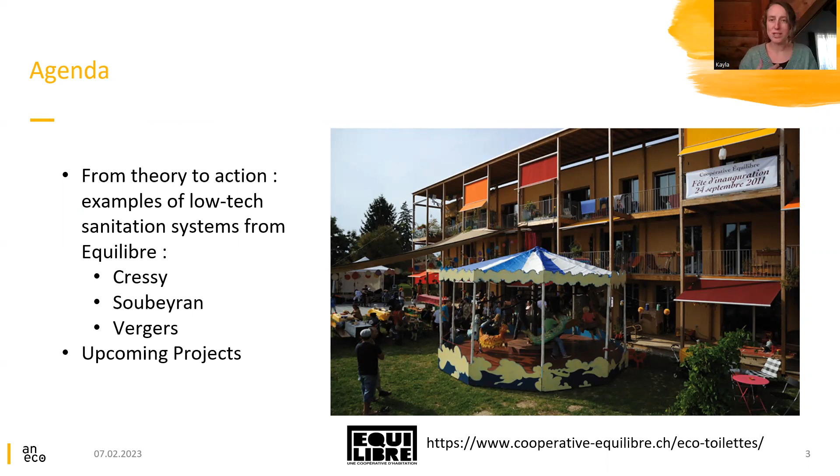Today, though, I will be mostly presenting the projects done by Equilibre, as there are three buildings made by Equilibre. It's an eco-responsible housing cooperative here in Geneva. And these are the first three apartment buildings that have implemented decentralized natural wastewater treatment systems in their plan. Note that these buildings were all built before Aneco existed, and since Aneco was founded in December of 2020, Aneco is now responsible and has taken over managing these systems, doing any type of changes or modifications to them that we will get into as I show.

So today I will go through Cressy, the first Equilibre building, built in 2011. At Cressy, there are two different types of treatment. There are the dry composting toilets, and then for all the gray water, there is a planted filter. As we're talking more about toilets today, I will focus on the toilet part, not the planted filter. There's a system at Soubeyran, which is a vermifiltration of both the black water and the gray water.

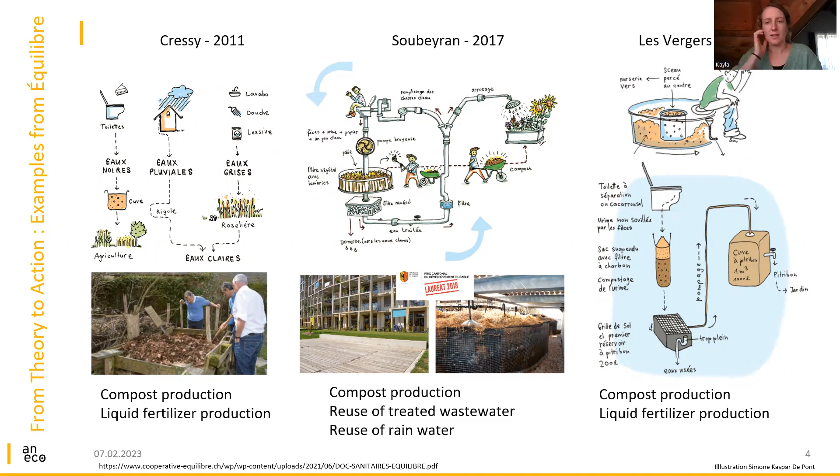And then there is Les Vergers, which was built in 2018 and has experimented with pilot projects of two different systems, one being the Cacaroussel, a dry toilet that is just within the apartment home, and then the Pitribon, which is the treatment of the urine that is separated.

So to begin, Cressy, as I just said, is a composting toilet. Here in the upper right-hand corner, we see the composters. These are three different composters, located in the basement of the building. These composters are connected to the Berger Biotechnik toilet, which is a German toilet. And since 2021, these toilets were also equipped with the Separette, a type of toilet seat which allows the urine to be separated. This was done because of odors coming off the ventilation on the rooftop and bothering the neighbors. And so it was decided to separate the urine.

Here to the bottom right, we see a schema of the composter. We see the ventilation, which is a passive ventilation going from the toilet to the rooftop. We also see the three different compartments of the waste. The first compartment is really the fresh fecal matter. In the beginning, it was fecal matter and urine and toilet paper and everything else that goes into a toilet. The second part is the volume once it's a bit degraded, but it really stays in the first and second part during the first year of composting.

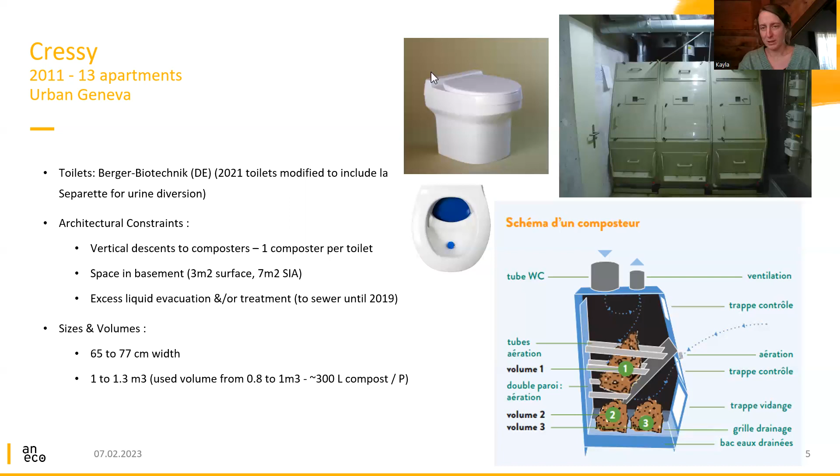Also the sizes and volumes. So the composter has a width of between 65 to 77 centimeters. And this width really depends on the household size and the apartment size. So it can treat from 1 to 6 people. And the volume is 1 to 1.3 cubic meters, with about 300 liters of compost per person being the volume necessary.

So a bit also about the maintenance of such a system. Each inhabitant of Cressy is responsible for their composter, and 2 times per month they go down into the basement to check on how the composter is going. They have to see if the compost has a nice humidity. If it's not humid enough, they must add water. If it's too humid, they add straw.

If there are flies, they can add leaves from the garden, which was a big breakthrough, because maybe 1 year after the start, they had many problems with flies. They tried many different solutions, and the one that worked best was introducing leaves from the yard, as the leaves contain spiders and many other insects, which are natural predators of the fruit flies. So if any flies are present, they can just add more leaves.

If they see the earthworm population is not so high, they can add more worms, and they have to clean the air filter if it's blocked. And then once per year, they have to empty the compost. Here on the right, there's a schema of this mass balance.

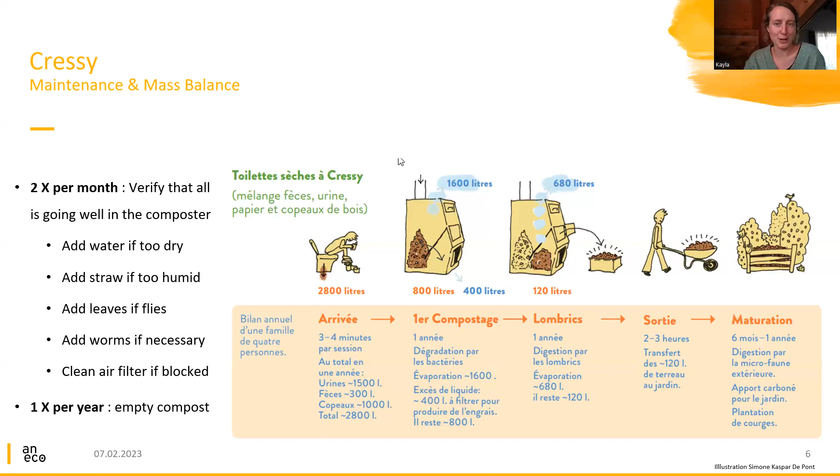So that's the composting toilet at Cressy, and now we can move on to the vermifiltration system at Soubeyran. Soubeyran is the second building built by Equilibre, and this building was much bigger: 38 apartments, 100 people, and 7 stories. With this size, it wasn't possible to redo the composting toilets. They had to think of a different technology, a different way of treating the water.

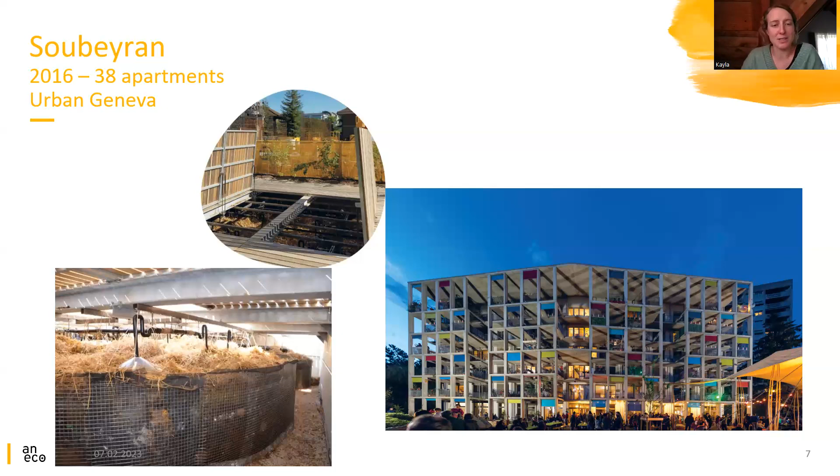The Equilibre bureau searched for many different solutions, and they finally found Philippe Moyer-Genoux, a biologist from Switzerland, who talked to them about this vermifiltration system, and this is what they ended up installing. So here's a schema. It's quite hard to understand, but we can walk through it. The toilet that's used is a Wostmann EcoFlush.

And why are the two separated? The black water and the urine are not actually treated separately. It's remixed, but the reason for separating the two at the toilet was really to have a very low flush volume.

So with this toilet, there's a 0.5 liter small flush and a 2.5 liter big flush. And this was really important to not have too much water arriving onto the filter system, because the earthworms, we do not want to drown them in too much water. So the system starts there with the toilets.

The black water then, after remixing, is found in an intermediate tank where there's a pumping station, and it's a shredding pump that will shred this content onto the vermifilter. The vermifilter for the black water is 44 square meters, so it's very large, and it's located in a treatment pit that's in the yard at Soubeyran.

I will go just quickly into the gray water so you know what happens to the gray water, though we're focusing mostly on toilets today. So the gray water is also treated by a similar system, a vermifilter system, though it is degreased first. It arrives via gravity into the treatment pits. And then from the degreaser, there's a part that's pumped from the bottom. Everything that sediments out of the degreaser is pumped onto a vermifilter, which is much smaller than the black water one.

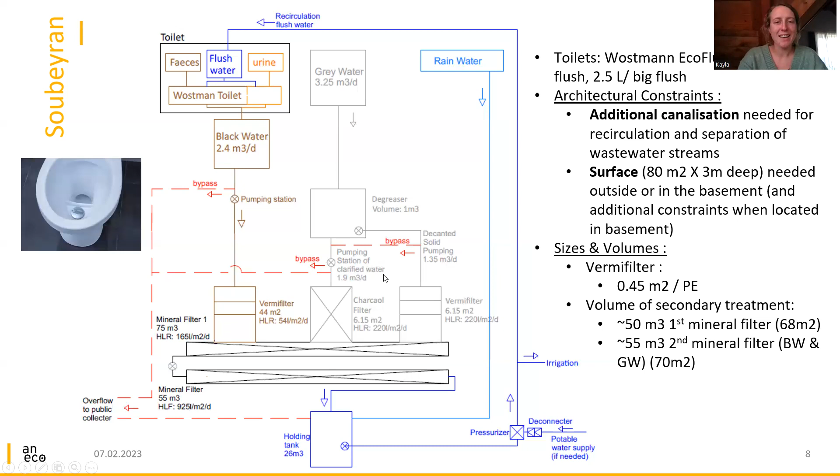Sorry. Yeah, so the sediments from the degreaser are pumped onto a smaller vermifilter, 6.15 square meters, much smaller than the 44 square meters for the black water. And then the clarified gray water is just treated on charcoal here. All of the water is then mixed and treated by two separate mineral filters.

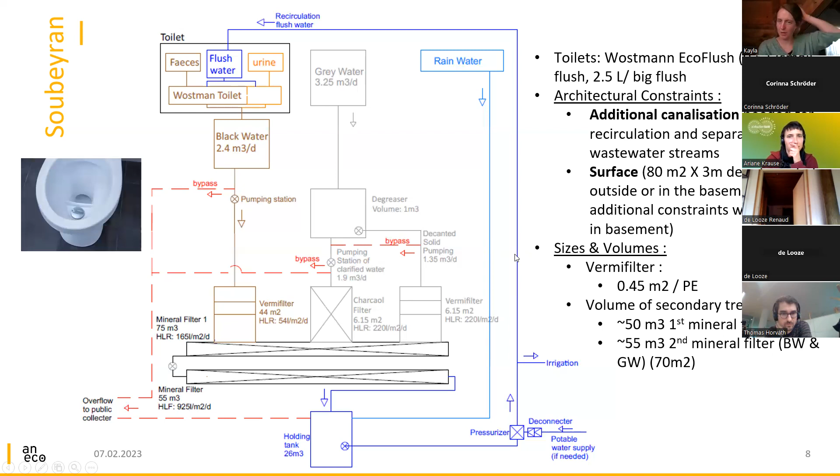So what are the architectural constraints of such a system? All right, here I have another schema that shows it a bit more nicely. The architectural constraints are that there's additional canalization needed. So there's two different canalizations coming out: the black water from the toilets and the gray water from the rest. And there's also two canalizations going in, because this water is then reused for flushing and for watering. The treated water is used for flushing the toilets and watering the garden. So you have the drinking water and the treated water going into the building.

It also needs a large amount of surface. So in this case, the treatment pit is 80 square meters by 3 meters deep. And this can be either outside or in the basement, depending on what is available for the different sites. Here at Soubeyran, they put it in the outside area as there was space.

Just to give an idea about the sizes, here the dimensions were 0.45 square meters per person equivalent. That was for just the vermifilter part. And then for the secondary treatment, the mineral filters, the first one is 50 cubic meters and the second one is 55 cubic meters. So we're talking quite large volumes here. So it takes quite a bit of space.

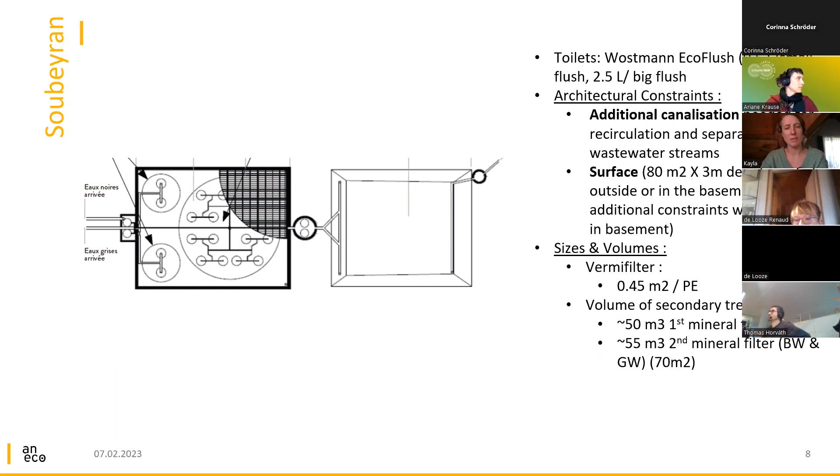Some implications for the inhabitants. They have to use ecological and biodegradable cleaning products and hygiene products, as it's a really natural system. The urinating needs to be done while seated in order for the separation to work accordingly. And also they need to clean the toilet in a certain way, because there can be struvite accumulation due to the very little flush water. So always adding citric acid or vinegar helps to avoid struvite accumulation.

The advantages are that it decreases the potable water consumption. So at Soubeyran, they consume 55 liters per person per day of potable water, in comparison to 140 liters per person per day for the average Swiss person. And also they have compost for the vegetable garden.

The maintenance of the system is actually quite low. They have to check on the system quite frequently, maybe once per week, once every 2 weeks, just to verify that things are going well. This can be done by smelling, by looking, that things look all right.

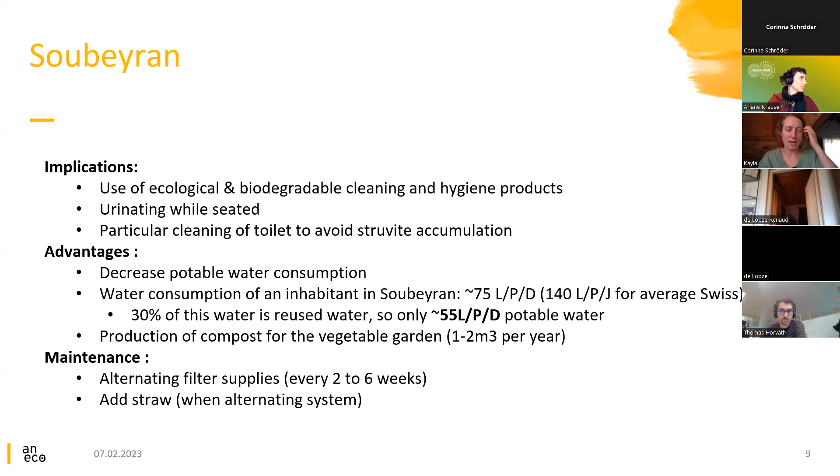And once we see that there's quite a lot of fresh material accumulating, every 2 to 6 weeks, you have to alternate which side of the large black water vermifilter is being used. So only half of the filter is given the water at a time, and then they add straw at the same time. This isn't necessary during summer, though it's done just for a visual aspect, and during winter it's important to maintain some warmth because it's located outside and it's quite cold here in winter.

So finally, getting to the third building, the most recently built building is Les Vergers. These are 3 buildings actually, also in the canton of Geneva, 67 apartments in total. And the challenge of this project was that there was no outdoor space as there is at Soubeyran, so they could not imagine implementing such a system outside. And also the buildings are 6 stories high, so they could not imagine something like Cressy.

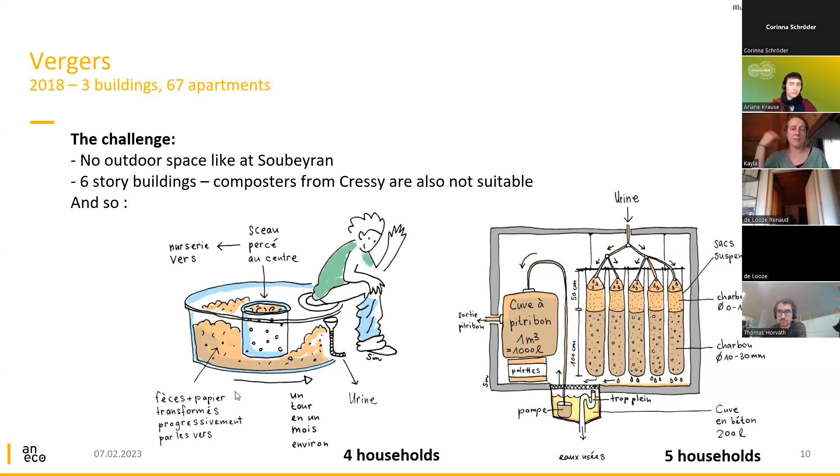So they had to be innovative, and that's where they decided to test 2 different systems, one being the Cacarrousel, which is this dry toilet that's located really in the bathroom, and then the pitribon, which is a treatment of urine in order to make a fertilizer out of it. They started small, so only 4 households had the Cacarrousel and 5 households were connected to the pitribon production.

The Cacarrousel, so here's some images of it to the right. It's a toilet that never needs to be emptied because there's earthworms within this composter that will degrade all of the matter, the fecal matter and the toilet paper, into oxygen, CO2, and into water, which will then just come out. The advantages of such a system is that it really has minimal architectural constraints.

It just has the same constraints as any standard toilet, so it needs some space and it needs ventilation, but it can replace a normal toilet in any existing apartment building. One constraint is the urine, so it separates the urine, it does not treat urine. So the urine has to be either connected to the already existing sewage and wastewater treatment plant, or it can be treated in situ with pitribon, for example, or any other urine treatment system.

The sizes, so the actual size can vary depending on the bathroom space, but the minimal is 86 by 86 centimeters because you really have to have this internal drum that has a minimum space for turning. I will explain a bit more how it works on the next slide. The height is 50 centimeters and the amount of compost is between 25 and 50 liters of compost per person, which is much less than Cressy.

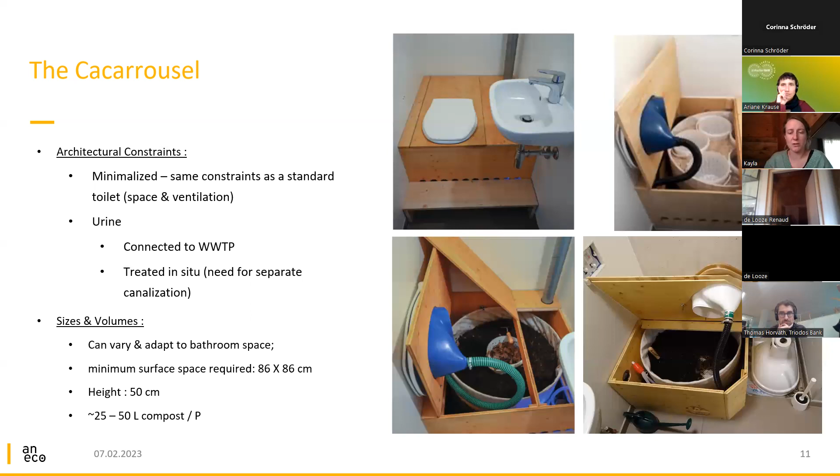At Cressy, it was 300. This is mostly, thankfully, due to the separation of urine, which wasn't imagined in the original case at Cressy. And I think now if we had to reimagine the composter at Cressy with the urine separated, we could also imagine a system much smaller than what was implemented.

So the maintenance and the challenges: once per week, when using the Cacarrousel, you have to turn the inner drum. So you arrive, you will dig a hole, and during 1 week, you will do your business in this hole. After 1 week, the family will turn the drum 1/8 of a turn. They will dig a new hole, cover up the business from the previous week, and continue. This will continue for 8 weeks, and by the time we come back to the spot where we originally started, there will be nothing left besides just nice soil, nice compost.

Another thing that must be done weekly is to verify the humidity. Depending on the ventilation of the bathroom and the heat of the bathroom, it can get very dry. And so it might be necessary to water the compost to make sure that it stays humid enough for the earthworms to do their job. And also if you water too much, there could be excess water that will accumulate in the plate at the bottom of the compost, and this should be emptied if you see anything.

Last thing is just to verify the urine canalization to ensure that it doesn't have struvite accumulation and to clean it with vinegar if necessary. And then twice per year, they have to lixiviate the compost, because what happens during this composting process is that most things will be evaporated. Most of the organic material is turned into CO2, and what's left is the mineral salts. And these mineral salts, if not lixiviated, will create a toxic environment for the earthworms. It will get too salty.

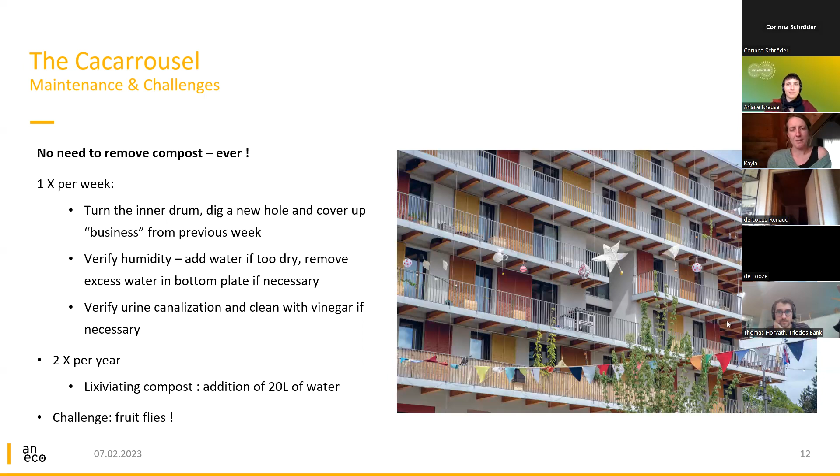So the Pitribon is the second system implemented at Les Vergers. This system uses the Laufen Save separative toilets, and it treats the urine on a geotextile bag that is filled with charcoal. And the main objective of this charcoal is to serve as a substrate that bacteria can then grow on, and it's the bacteria that will then nitrify the ammonium into a stabilized state, nitrate, which can be used as a fertilizer.

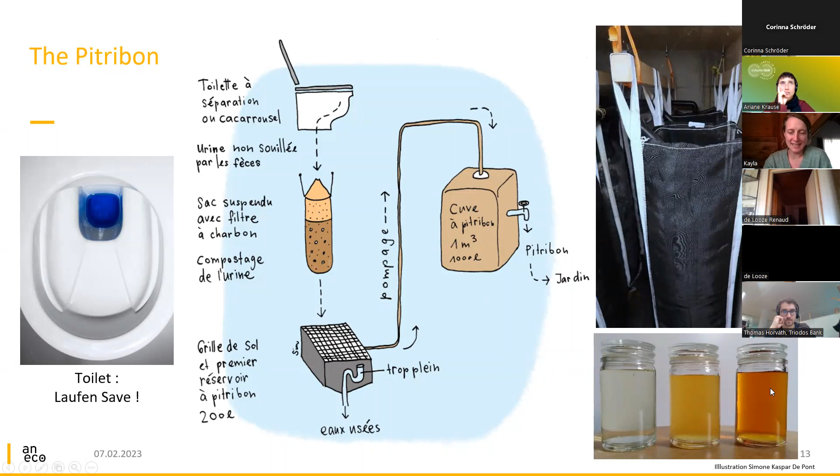On the bottom here, we have some images of the different types of Pitribon that we have. The maintenance for such a system, so it doesn't require too much maintenance, just regular cleaning of the toilet, again with citric acid or vinegar for the struvite formation.

The sizes needed, so the main goal is to really arrive at a 48-hour hydraulic retention time. This is because the process of nitrification takes time, and also to start degrading micropollutants and things like this. So we really aim for 48 hours retention time. And this, depending on how much urine is coming in, it can be 20 liters of charcoal per person for dry toilets, or 30 liters of charcoal per person for flush toilets.

Its dimension, the size is 35 by 35 by 170 centimeters. So it's actually quite small. It doesn't take up too much space, and this type of bag is for 5 people typically, given the amount of charcoal that can be put into it.

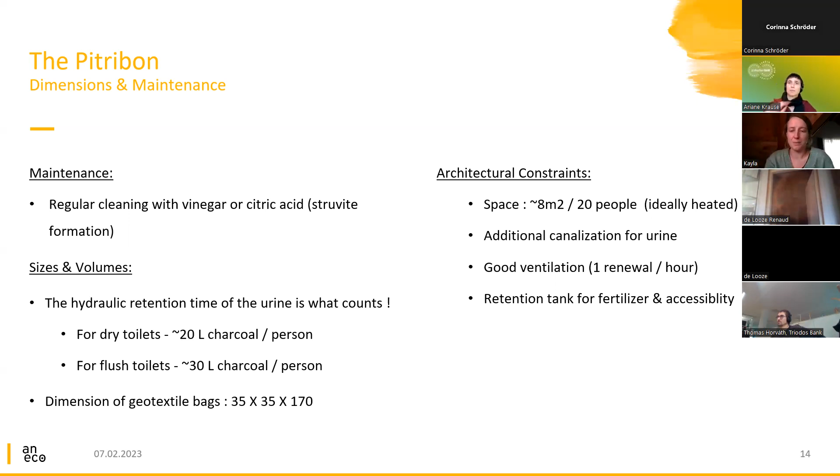So I'm getting to the end. But one thing I wanted to state is that these systems are in constant evolution. So, for example, at Cressy, there was this long battle with fruit flies, which I mentioned before, and the final solution found was to add the leaves from the yard. There were also odors from the ventilation, which caused us to separate the urine, and so the composters now only treat the brown water, the fecal matter. It's not really water, the fecal matter, and not the urine.

And also at Soubeyran, the system has changed quite a bit since it was first inaugurated in 2017. The way that the gray water was distributed was changed. The wood chips that were originally in the vermifilter were replaced with charcoal. This was then done also for the black water filters. There was a degreaser that wasn't originally in place that was implemented. And there are even more changes, which will happen in 2023. So it's really pilot projects that are in constant evolution and constant study.

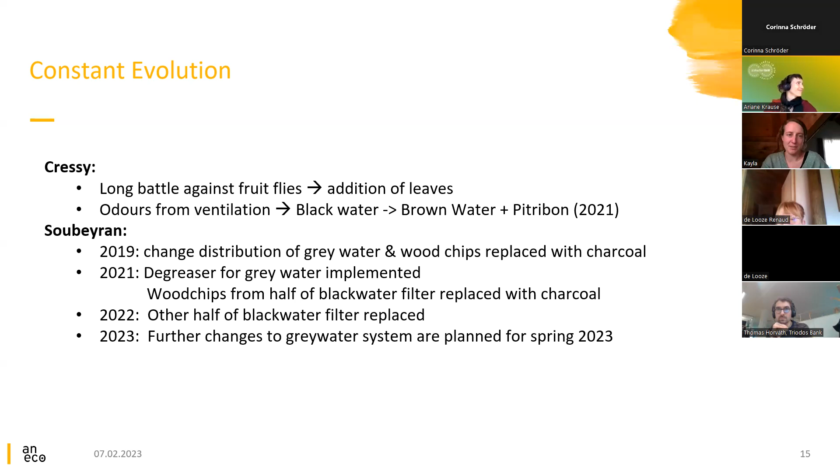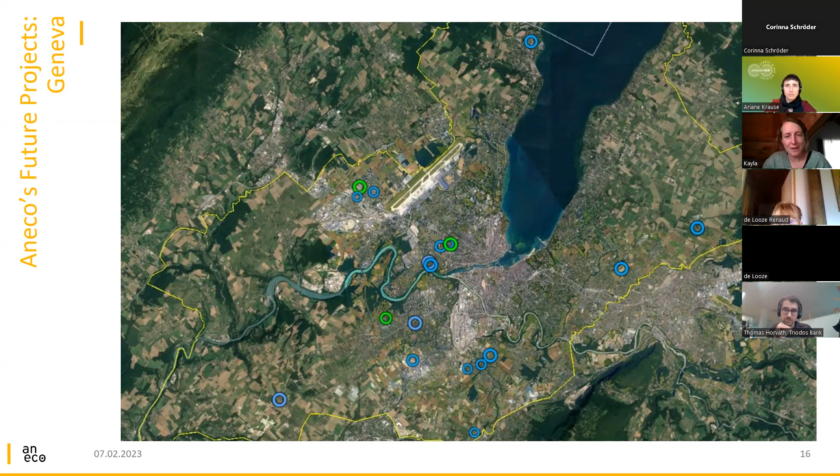So that being said, we have some more projects. These are Aneco projects now that are upcoming in the future. The 3 green circles are the 3 buildings of Equilibre that actually exist, and all of the blue circles are projects that will be built in the future.